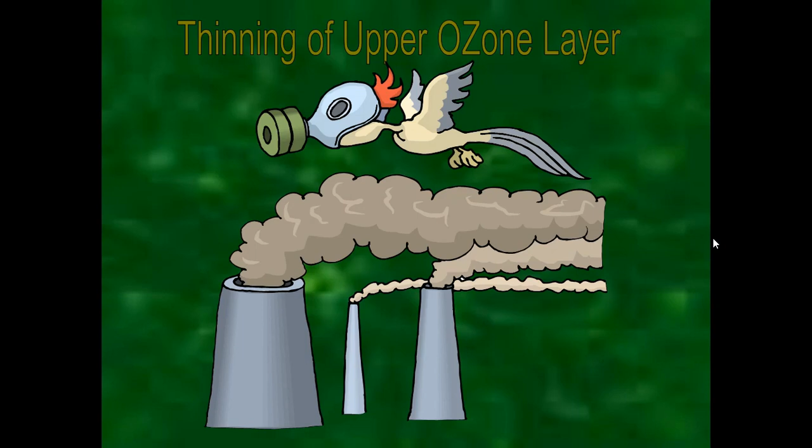Later on we have seen acid rains, and today we will see there are a lot of problems regarding air pollution. Today we will see indoor air pollution also, and some filters - settling chambers, cyclones, venturi scrubbers, fabric filters. So we have seen all these things before.

Riding the bicycle is a good alternative as far as health and fitness is concerned. So riding bicycle for small distances, promoting this, and telling your friends and family regarding this pollution. We must check our cars and bikes regarding PUC, and use public transport. That is all about the preventive measures.

Basic measures - we have to keep up to date our knowledge regarding environmental consciousness, and encourage our parents to use carpools. We have to make social groups regarding stopping pollution, and consume natural energy in daytime - switching off the lights, fans, heaters etc. when we leave the room.

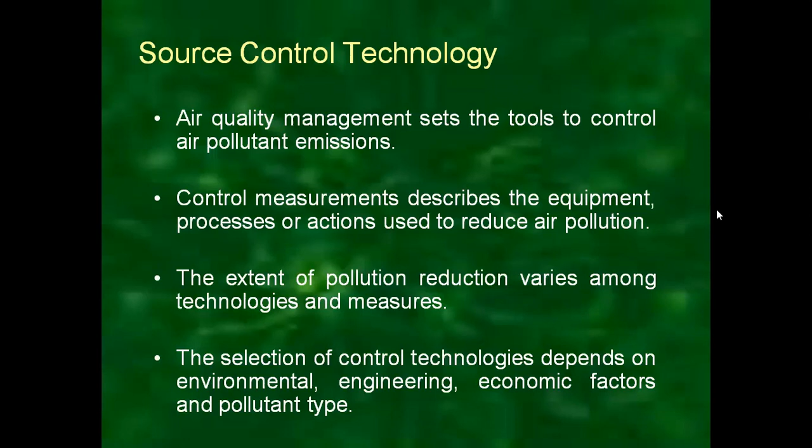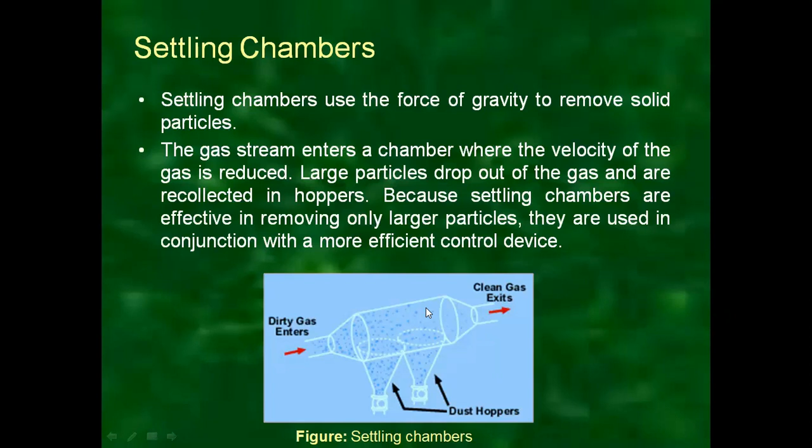Because settling chambers are effective in removing only large particles, the drawback is they cannot remove small particles, and they are used in conjunction with more efficient control devices. So this is regarding settling chambers - dirty gas enters from this side, exits from this side, and small particles are not removed, but large particles settle down with gravity, as you can see with the mechanism here.

As gas changes direction, the inertia of the particles causes them to continue in the original direction and be separated from the gas stream. All right, so we are forcing the particulate-laden air to change direction, and as gas changes direction, the inertia of the particles causes them to continue in the same direction, and that is the reason for separation from the gas stream.

Okay, then the walls of the cyclone narrow towards the bottom of the unit, allowing the particles to be collected in the hopper. The cleaner air leaves the cyclone through the top of the chamber, flowing upward in a spiral vortex, formed within a downward moving spiral. Cyclones are efficient in removing large particles but are not as efficient with smaller particles. For this reason, they are used with other particulate control devices.

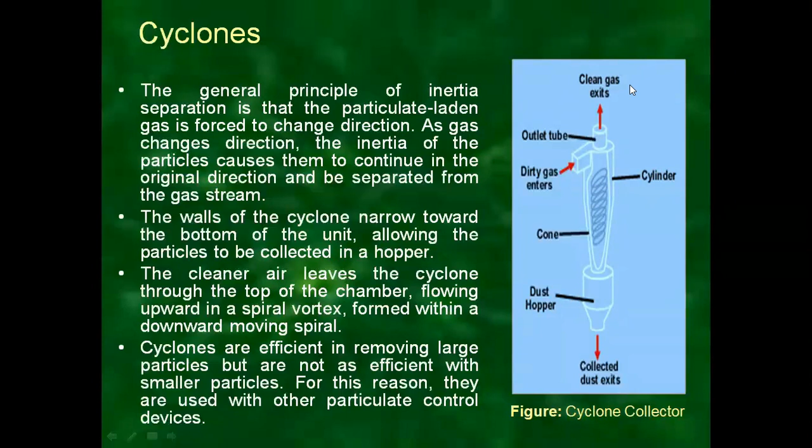Then Venturi scrubbers. Venturi scrubbers use a liquid stream to remove solid particles. In the Venturi scrubber, gas laden with particulate matter passes through a short tube with flared ends and a constricted middle. This constriction causes the gas stream to speed up when the pressure is increased. So Venturi scrubbers use a liquid stream to remove solid particles, and gas laden with particulate matter passes through a short tube with flared ends and a constricted middle.

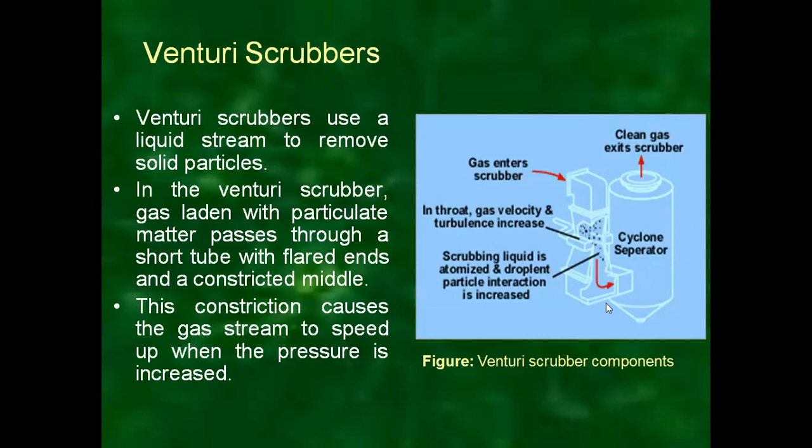Now, continuing with the Venturi scrubber, the difference in velocity and pressure resulting from the constriction causes the particles and water to mix and combine. The reduced velocity at the expanded section of the throat allows the droplets of water containing the particles to drop out of the gas stream. Venturi scrubbers are effective in removing small particles, with removal efficiencies up to 99%. It means it is very efficient at removing small particles.

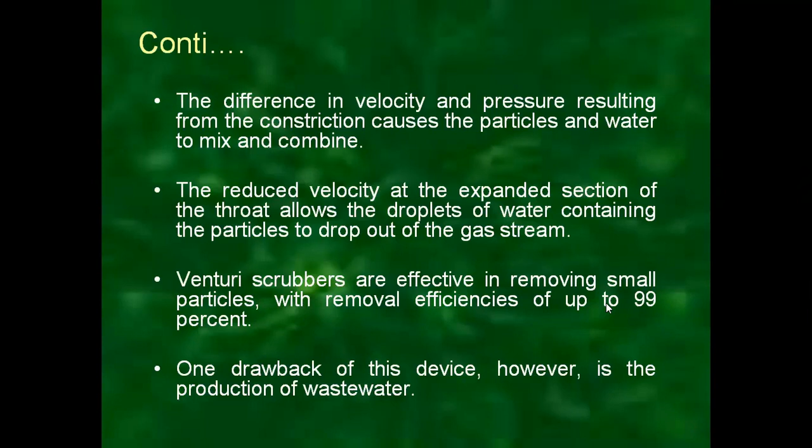One drawback of the device is its production of wastewater. It produces a lot of wastewater during the process. As we have just seen, it requires liquid to remove the particles. Hence, a lot of wastewater is produced.

The selection of fiber material and fabric construction is important to bag house performance. The filter material from which the fabric is made must have adequate strength characteristics at the maximum gas temperature expected and adequate chemical compatibility with both the gas and the collected dust.

Absolutely. See, basically whatever material we are selecting for the filter must have strength, because gas is flowing at some pressure, so it may not fail. It is possible that it will fail in the process of filtration. So it must withstand the maximum gas temperature expected and have adequate chemical compatibility with both the gas

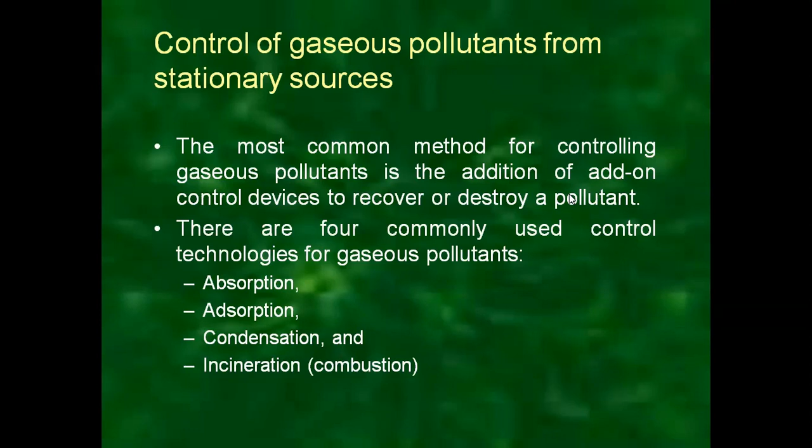Absorption is a process in which a gas pollutant is dissolved in a liquid, where the liquid is used to dissolve it in the process. Water is the most commonly used absorbent liquid.

Then as the gas stream passes through, the liquid absorbs the gas in much the same way that sugar is absorbed in a glass of water when stirred, just like that. So absorption is the phenomenon wherein the gaseous pollutant is dissolved in a liquid, where water is most commonly used. Water is the most commonly used absorbing liquid, just as sugar is absorbed in water. The example is quoted here.

In continuation, we can see absorbers are often referred to as scrubbers, and there are various types of absorption equipment. The principal types of gas absorption equipment include spray towers, packed columns, spray chambers, and Venturi scrubbers. In general, absorption can achieve removal efficiencies greater than 95%.

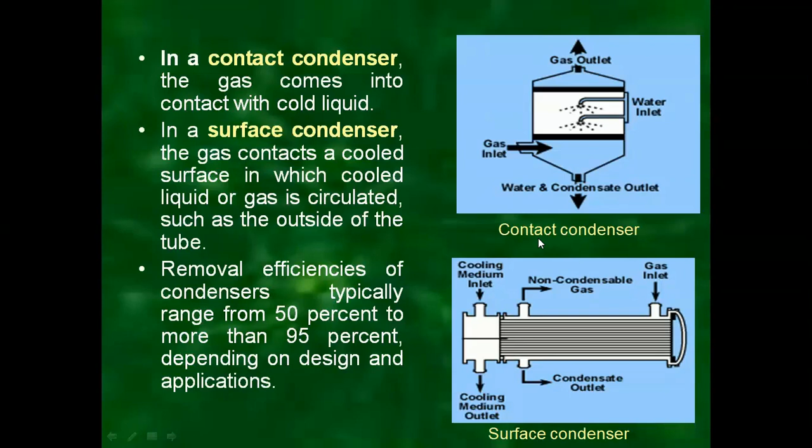Now last, incineration. Incineration, also known as combustion, is also used to control the emissions of organic compounds from process industries. This control technique refers to the rapid oxidation of the substances through the combination of oxygen with the combustible material in the presence of heat. When combustion is completed, the gas stream is converted to carbon dioxide and water vapors.

Equipment used to control waste gases by combustion can be divided into three categories: direct combustion or flaring, thermal incineration, and catalytic incineration. As we'll see further, there are three types basically: direct, thermal and catalytic.

Incineration, also known as combustion, is mostly used to control emissions. The technique refers to the rapid oxidation of substances through the combination of oxygen with the combustible material in the presence of heat. When it is completed, the gas is converted to carbon dioxide and water vapors. So it is all about the heat. So, direct combustion.

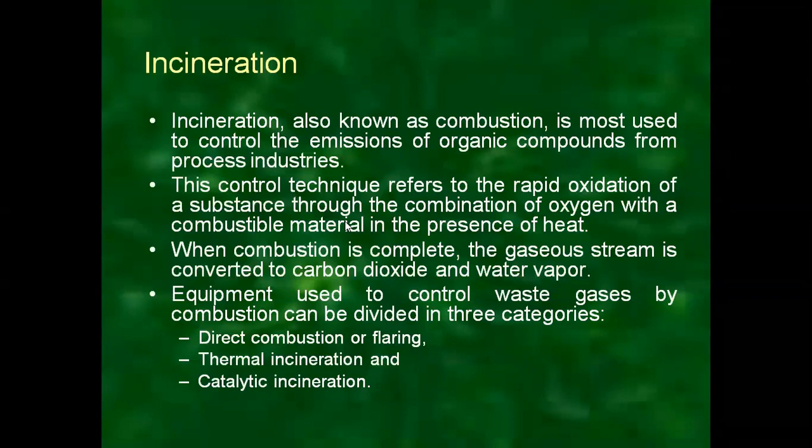A direct combustor is a device in which air and all the combustible waste gases react at the burner, where complete combustion must occur instantly since there is no residence chamber. A flare can be used to control almost any emission stream containing volatile organic compounds. Studies conducted by EPA have shown that the destruction efficiency of a flare is about 98%. So this is direct combustion.

In direct combustion, we have seen the device in which the air and all the combustible waste gases react at the burner. In thermal incineration, the combustible waste gases pass over or around a burner flame into the residence chamber where oxidation of the waste gas is completed. Thermal incinerators can destroy gaseous pollutants at efficiencies of greater than 99% when operated correctly.

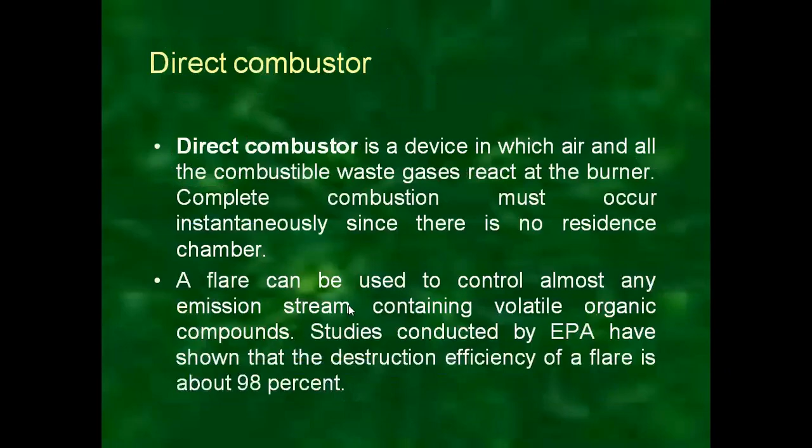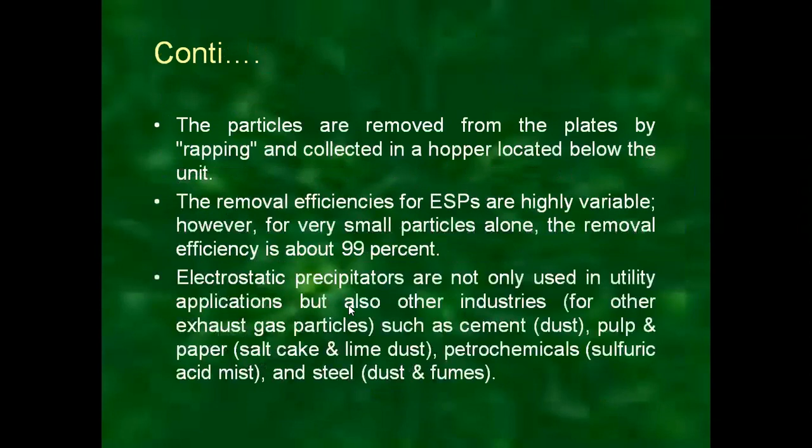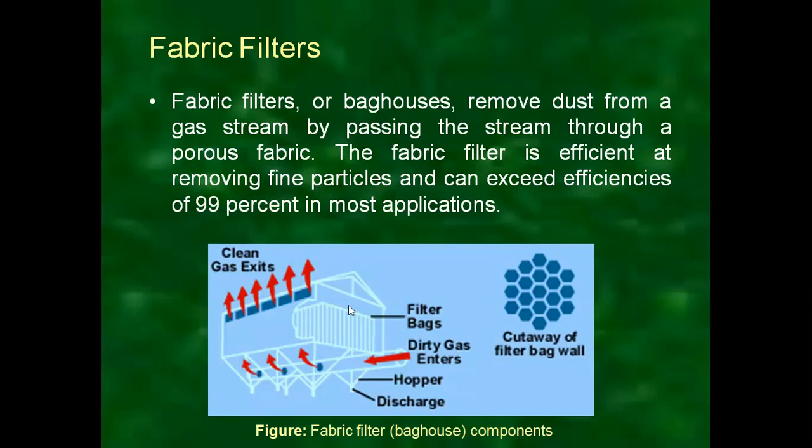So thank you very much students for the attention, and I would like to review the entire class. Today we have seen the industrial control measures to reduce air pollution: the settling chamber, cyclones, venturi scrubbers, and fabric filters. Fabric filters and venturi scrubbers are very efficient at removing small particles, whereas settling chambers and cyclones are not; they can only remove large particles. Later on we have seen the processes of absorption, adsorption, condensation and incineration.